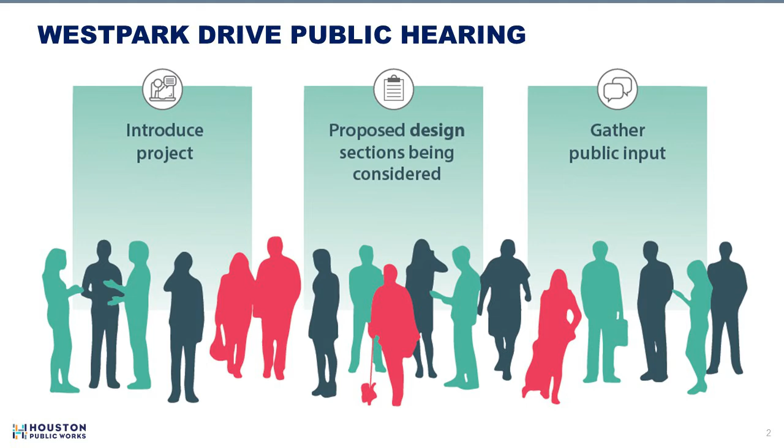In this presentation, I will describe the proposed project, provide an overview of the environmental studies that have been performed, explain the next steps in the project development process, and outline the methods for submitting comments.

The City of Houston encourages you to provide comments after this presentation and during the comment period, which extends 15 days after the day this presentation is posted online. Comments must be received via phone, email, or mailed and postmarked by Thursday, April 8th to be included in the virtual public hearing summary report.

You could submit comments in the following ways: via phone number 832-395-2090 and press 1, via email to buildforward@houstontx.gov, via the Westpark project page at www.publicworks.houstontx.gov/node/394, and via mail to Attention Westpark Drive, City of Houston, P.O. Box 1592, Houston, Texas 77251.

For general questions, please call the City of Houston phone number at 832-395-2090 and leave a message. You may email the City at any time in the development process at buildforward@houstontx.gov to ask questions about the project.

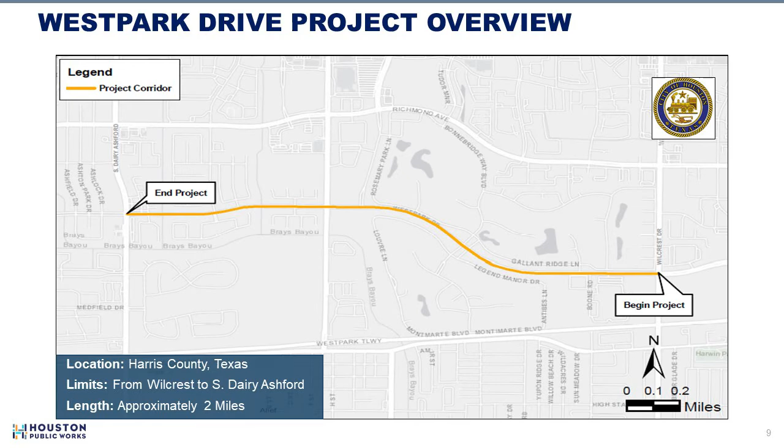The project area extends from Wilcrest Drive to South Dairy Ashford Road, west for approximately 2.13 miles on a portion of Westpark Drive located in Harris County, Texas. The existing right-of-way is 100 feet, and the proposed improvements would be within the existing right-of-way. No residential or commercial displacements are anticipated.

Westpark Drive begins as a 4-lane roadway from Wilcrest Drive, running west, just past the detention pond near Royal Oaks Country Club. It then becomes a 2-lane roadway to just west of Royal Oak Bridge. The project area then turns into a 4-lane section until just east of Fern Drive and back into a 2-lane roadway just east of Oxford Oak Street. Finally, Westpark Drive becomes 4 lanes to South Dairy Ashford Road, where the project ends.

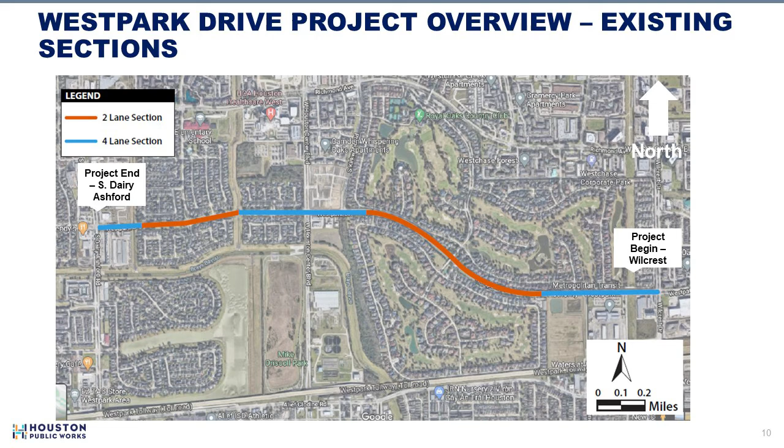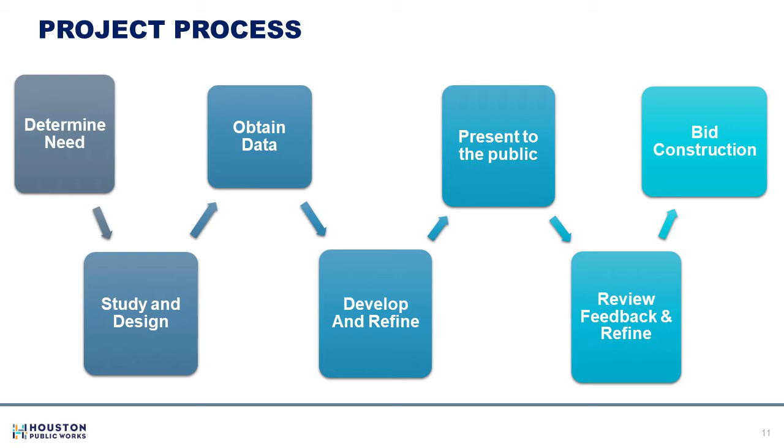Currently, Westpark Drive project area extends from South Dairy Ashford to Wilcrest Drive. The average right-of-way within the project area is 100 feet. Westpark Drive is currently a 4-lane road from Wilcrest Road to just west of the detention pond near Metro Center on Westpark Drive. There are left turning lanes and dividing medians throughout until Westpark becomes a 2-lane roadway with no dividing medians. This part of the road narrows to 2 lanes until just east of South Kirkwood Road.

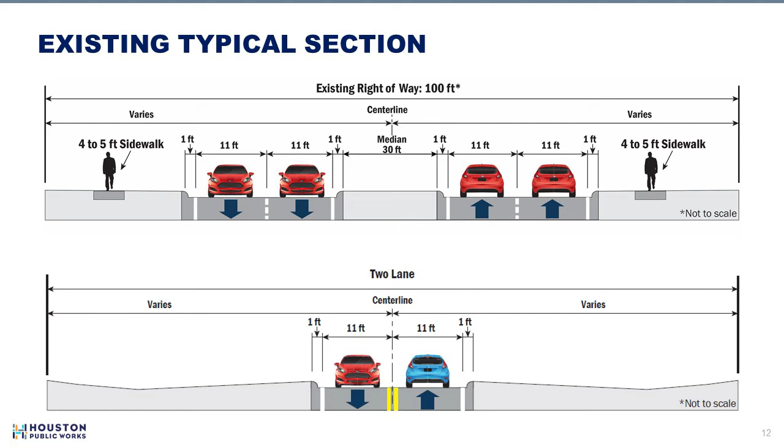At this point, Westpark Drive widens again to 4 lanes with divided medians and left turning lanes until just east of Fern Drive, where it narrows again to 2 lanes. Finally, the roadway widens to 4 lanes with divided medians and left-turning lanes, with the project area ending at South Dairy Ashford Road.

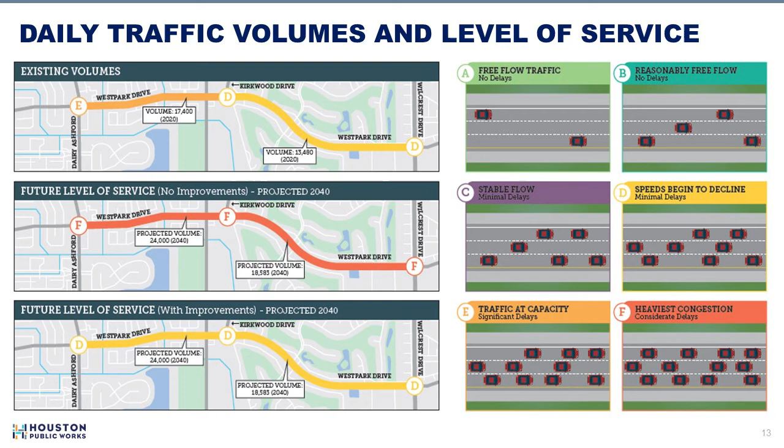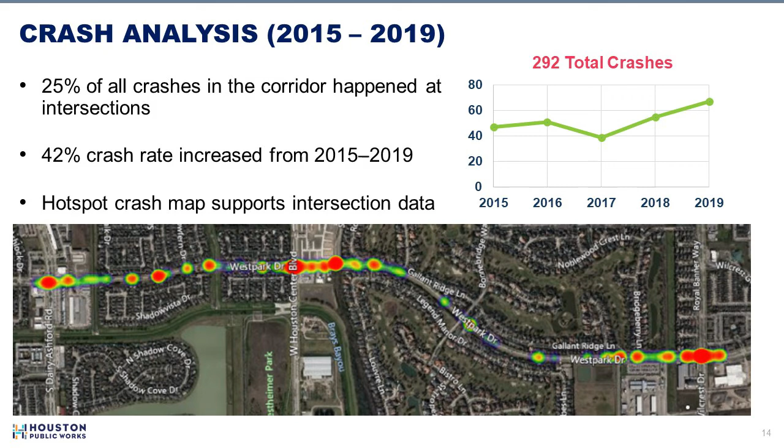The original Westpark Drive project was planned as a 4-lane boulevard, though there are currently 2-lane sections throughout the approximately 2-mile stretch of road. There are portions of the eastbound side of Westpark Drive which are missing in certain 2-lane sections. For example, the segment between West Houston Center Boulevard and Wilcrest Road exists as a 4-lane boulevard, with the exception of the eastbound lanes between Kirkwood and east side of Royal Oaks subdivision.

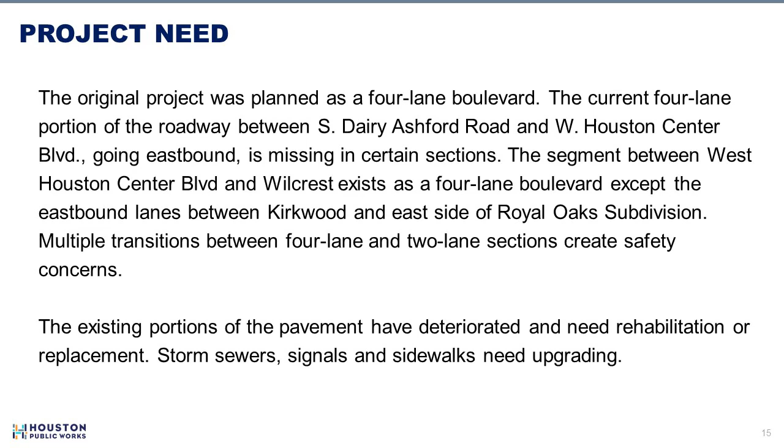Also, multiple transitions between 4-lane and 2-lane sections create safety concerns. The existing portions of the pavement have deteriorated and need rehabilitation or replacement. Storm sewers, as well as signals and sidewalks, need upgrading to meet current City of Houston standards.

The project purpose is to improve safety and mobility, complete missing portions of the boulevard, upgrade traffic signals at intersections to current City of Houston standards, improve pedestrian access and meet ADA requirements, improve drainage and reduce street flooding, improve underground utilities as necessary, add bike lanes and shared use paths to extend the system from existing on-street lanes along Westpark Drive and along Wilcrest to the future hike and bike trail, and consolidate medians to manage access.

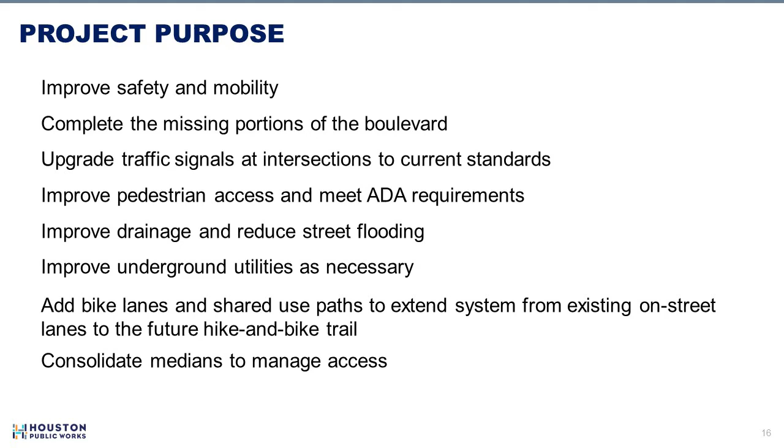The City of Houston has designed 4 proposed typical sections for current stretches of this project. In all 4 designs, the improvements include 4 travel lanes, 2 in each direction, raised medians with trees, along with different configurations of bicycle and pedestrian accommodations. The 4 sections are discussed in more detail in the following slides.

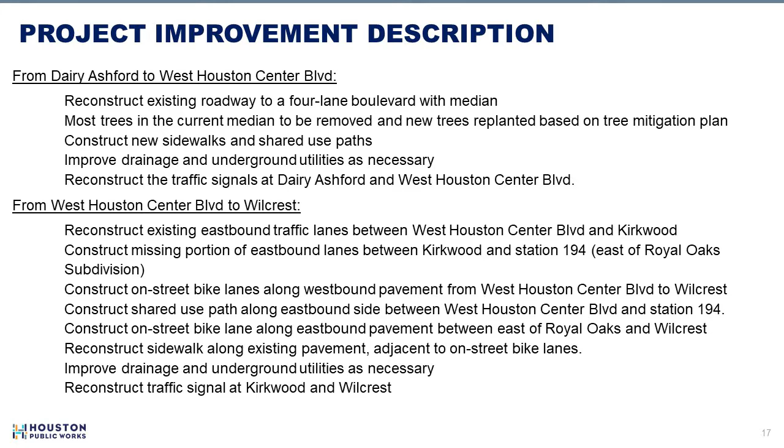The first section of roadway design, beginning at Wilcrest Drive to just east of Royal Oaks Country Club, includes 20-foot wide medians, but differs from the proposed Section 2. In this section, the 4 11-foot wide lanes exist on mostly existing pavement, but would be extended with 2 5-foot wide sidewalks and 2 5-foot wide bike lanes on proposed and existing pavement in each direction.

The proposed Section 2 extends from east of Royal Oaks Country Club to West Houston Center Boulevard and includes 2 11-foot wide travel lanes in each direction with 2 20-foot medians. This section would also include 1 dedicated 10-foot wide shared use path going eastbound and a dedicated 5-foot wide sidewalk with a 5-foot wide bike lane going westbound.

The proposed Section 3 on Westpark Drive from West Houston Center Boulevard to east of Shadowfern Drive would also have 4 11-foot wide lanes, 2 in each direction. However, this section would have 18-foot wide raised medians and 2 dedicated 10-foot wide shared use paths for bicyclists and pedestrians on either side.

For the proposed Section 4, from east of Shadowfern Drive to South Dairy Ashford Road, there would be 4 11-foot wide travel lanes, 2 in each direction, running east and westbound, as well as 26-foot wide raised medians. Pedestrian upgrades to this section include 2 dedicated 6-foot wide proposed sidewalks on either side of Westpark Drive.

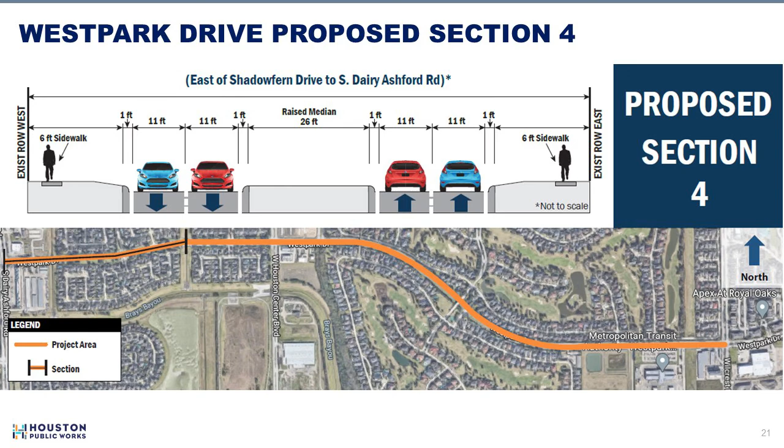Though no additional signals would be built, existing signals located at the intersections of South Dairy Ashford, West Houston Center, Kirkwood, and Wilcrest would be replaced to meet the current City of Houston utility and safety standards, including safety upgrades for bicycles and pedestrians.

Here is a screenshot of the legend for the project layout that you can find on the website. These legends are included on each page of the layouts, so you can reference it as you review them. The screenshot on the right shows the colors that will fill the proposed design. These colors identify the limits and major aspects of the project.

Let's walk through them. The yellow color identifies the proposed pavement on Westpark Drive. The existing right-of-way line is orange. The red line marks the end of the proposed intersections and additions to the roadway. The green line shows the proposed sidewalk, and the pink line outlines the roadway itself. Lastly, the black line with smaller black lines mark the updates to the roadway and shows additional lanes.

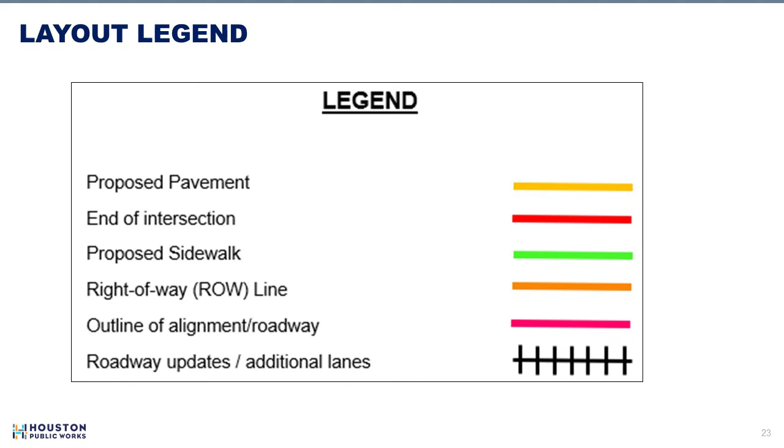The engineering team has developed project layouts to design proposed improvements that meet the project needs, while minimizing the additional right-of-way needed and displacements and impacts to private property. We are showing a high-level overview of layouts and have included a large PDF on the project website. You can see the link at the bottom right of the slide that will take you to the maps on the City of Houston project website.

The engineering team has broken the project layout into 2 pages to show you more detail about the roadway design sections. If you would like to take a closer look at the designs for a specific area of the project, you can download the project layout by clicking on the link on the presentation PDF, then clicking on the project layout link and zoom in on your locations of interest.

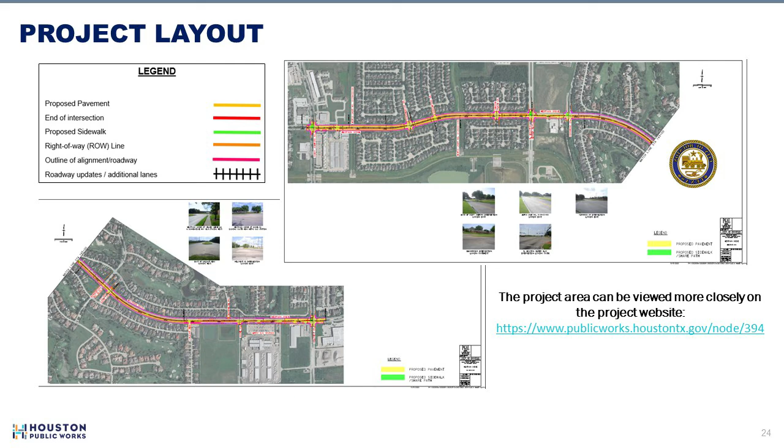The City of Houston considered several factors when developing the designs and upgrades to provide equitable access for all Westpark Drive users, including bicyclists and pedestrians. These considerations include bike lanes, sidewalks, and shared use paths.

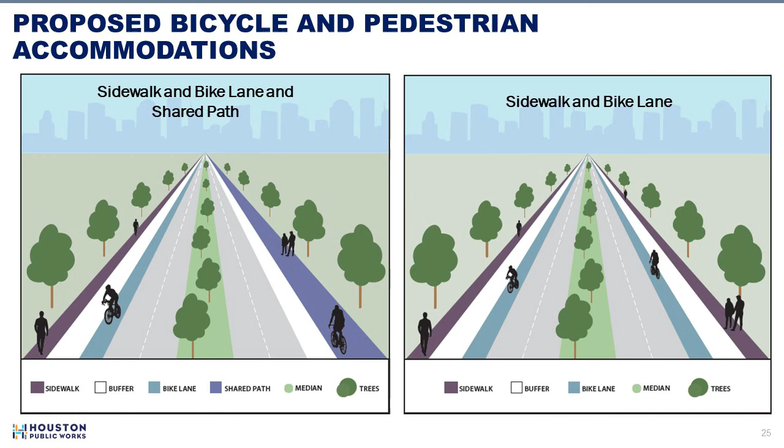Shared use paths and bike lanes are proposed running west and eastbound along the roadway. 5-foot sidewalks are also proposed with a 3-foot buffer, shown in white, between the sidewalk and the bike lanes. There are also 5-foot buffers between the shared use paths and the road. The two graphics here show a representation of sidewalks, bike lanes, and shared paths, which are all proposed bike and pedestrian accommodations varying throughout the approximate 2-mile roadway.

Funding of the Westpark Drive project breaks down into federal, local, City of Houston, and state, TxDOT. The total design fee is approximately $2.1 million and fully funded by the city. Federal funding participation is approximately $9.7 million. The total construction cost is approximately $15.4 million. The City of Houston provides the design and construction, while TxDOT provides oversight and review due to federal funding.

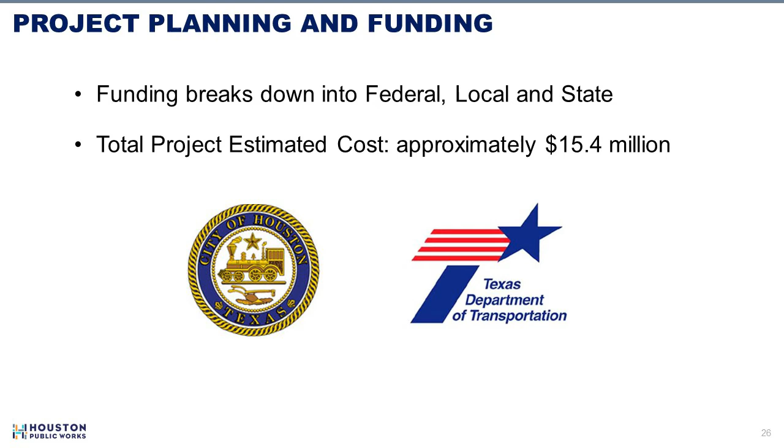I will now discuss the environmental studies completed for this proposed project. The project team identified and evaluated potential environmental impacts that could occur as a result of constructing the proposed improvements. Technical reports for each of these studies are available online on the project webpage for public review.

As part of the project's NEPA compliance, the City of Houston considered biological resources, community impacts, water resources, hazardous materials, archaeological and historical resources, and park and recreational areas. The project was designed to avoid or minimize impacts to the greatest amount practicable. Overall, impacts to the environmental resources as a result of the proposed Westpark Drive improvements would be minimal.

First, I will discuss the biological resources study. Most of the project area consists of urban streets and neighborhoods. The project area does not contain suitable habitat and is not within range of any listed threatened or endangered species. The project area is also not within range of any species of greatest conservation need.

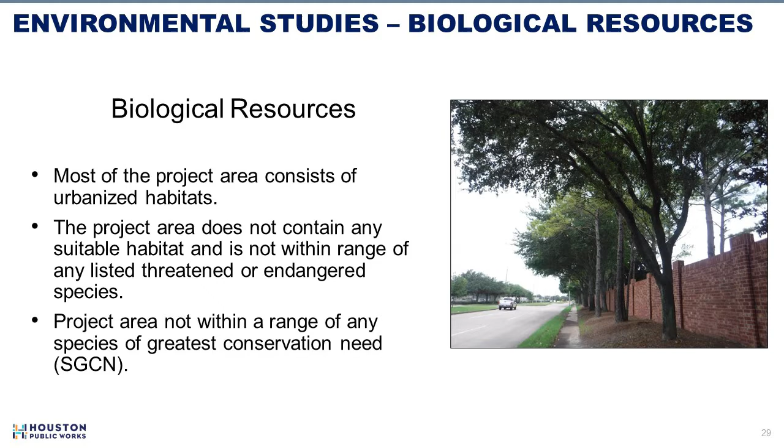Next, I will discuss community impacts. Minor access changes would result from median opening consolidations. No displacements are anticipated as a result of the proposed project. Limited English proficiency populations were identified within the project area. These persons were provided, and will continue to be provided, the opportunity for meaningful involvement in the NEPA process for the proposed project.

Design elements for the proposed improvements include improved drainage, as well as increased amenities for bicycle and pedestrian traffic. Increased safety and mobility is expected with a new proposed bike lane, which would integrate into the existing bike path network. Continuous sidewalks are also proposed while improving mobility within the project area.

No displacements and no adverse community impacts are anticipated with the proposed project. Overall, the proposed design features would enhance mobility and access and would reduce congestion and improve safety for both minority and non-minority census geographies.

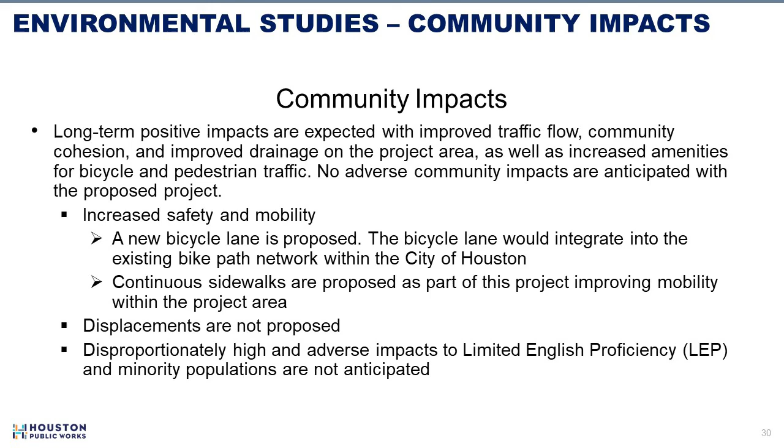In addition to community impacts, access changes provide significant impact to the project area. The first access change is the closure of the existing median opening east of Dairy Ashford. This access change impacts two driveways at this location.

The second access change is at the Shadowfern intersection of Westpark Drive. Access to this intersection allows left turning access to the side street but no access out, turning left out of the side street.

The most significant access change is the closure of the median opening on Westpark between West Houston Center Boulevard and Kirkwood Road. This closure impacts the left turn access to the gas station from westbound traffic. This location was decided on due to safety concerns and the need for access from the westbound left turn lane, which has a high volume of turning vehicles.

The last access change is the median opening providing access to the Cube Storage Building west of Wilcrest. Left turns out of this storage facility are not ideal.

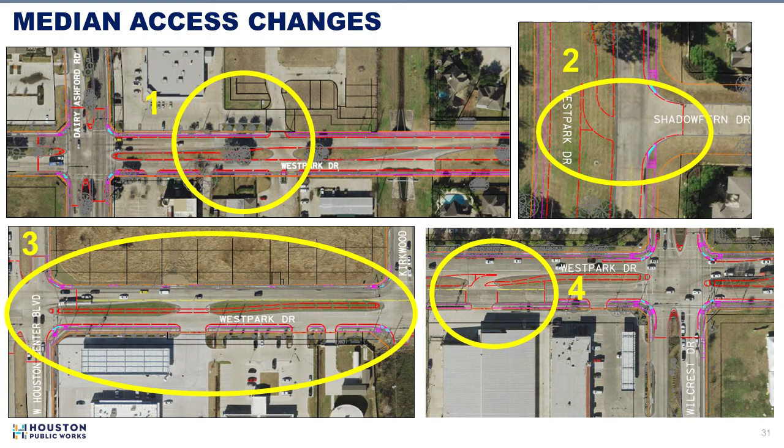Another environmental resource studied was waterways. The Westpark Drive project area crosses two man-made drainage canals between South Dairy Ashford and West Houston Center Boulevard, and each of these canals connects with Brays Bayou. Approximately 72% of the project area is located within the 100-year floodplain, and 28% is within the 500-year floodplain.

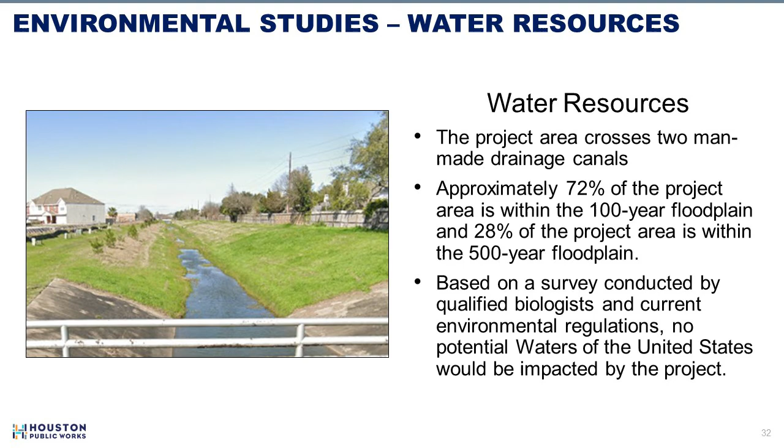Based on a survey conducted by qualified biologists and current environmental regulations, no potential waters of the United States would be impacted by this project.

No unresolved hazardous material concerns were identified, and no potential concerns were found during the hazardous material initial site assessment process which would impact the project area. No hazardous materials action is required for the project area.

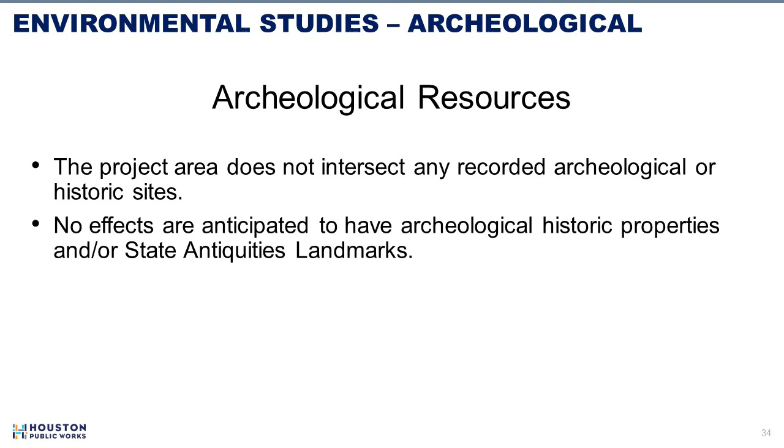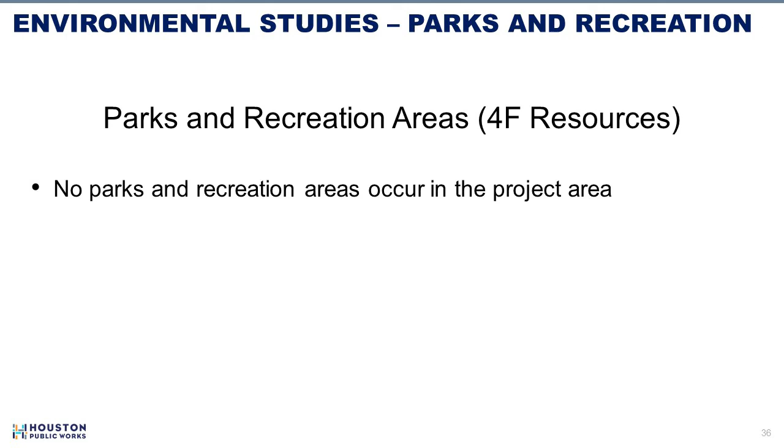Next, we have archaeological resources. The Westpark Drive project area does not intersect with any recorded archaeological or historic sites. No effects are anticipated to archaeological historic properties and/or state antiquities landmarks. Regarding non-archaeological historic properties, no historic properties are anticipated to be impacted by the proposed project. No parks or recreation area impacts occur in the project area.

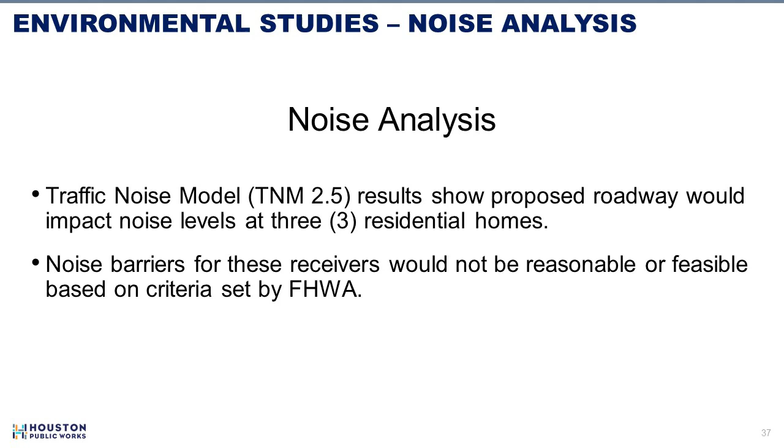Noise impacts were forecasted using the Federal Highway Administration's Traffic Noise Model 2.5 to estimate future noise levels at residences and other sensitive receivers near the proposed Westpark Drive. Most of the residential homes on Westpark Drive have existing 7-foot barriers. Noise walls up to 20 feet in height placed along the right-of-way would not be reasonable or feasible based on criteria set by FHWA.

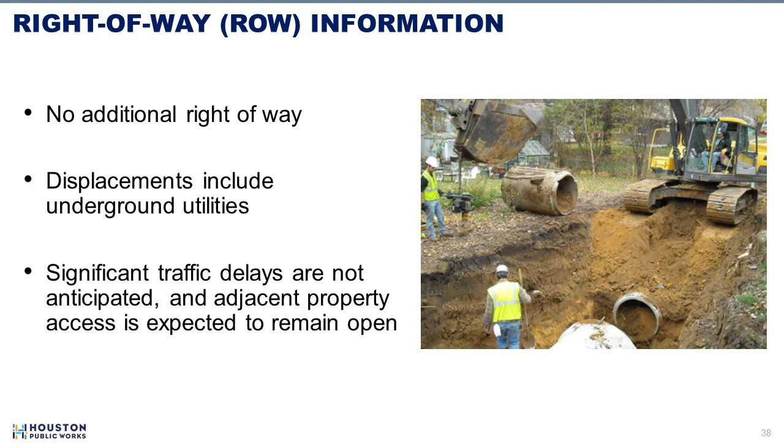Therefore, a noise wall is not proposed for these locations. The proposed project would take place within the existing right-of-way. This project would not displace any above-ground structures, but would include the displacement and relocation of underground utilities. Significant delays in traffic due to construction would not be anticipated, and access to adjacent properties would be expected to remain open throughout the construction process.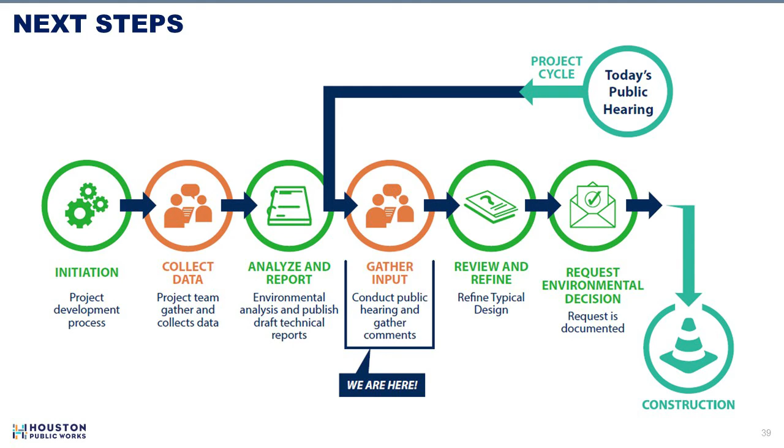The next steps include refining the design and requesting the environmental decision. Provided the environmental documents and process are approved, the project would then move into detailed design and finally construction. As stated earlier, construction is scheduled to begin in mid-2021. The project team anticipates that construction would take approximately 2 years.

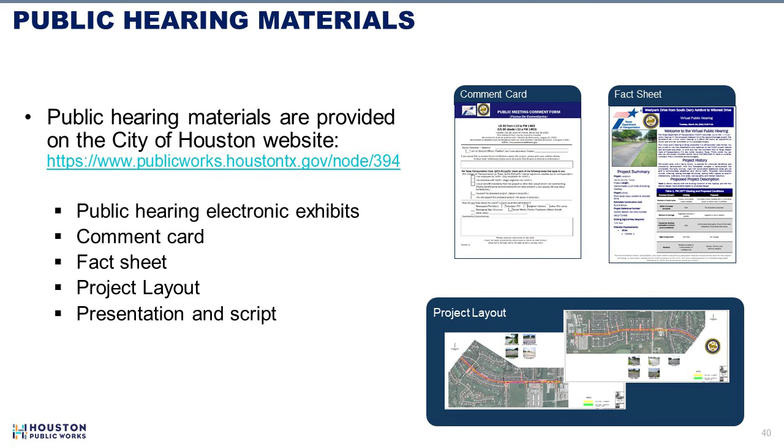The City of Houston project website shown here contains all materials presented in this virtual public hearing, including this presentation in both English and Spanish. These materials include exhibit boards, a comment card, a project fact sheet, project layouts for the proposed improvements, presentation and script, and the environmental technical reports. The project layouts provide a more in-depth look at details such as intersection improvements, sidewalks, shared use paths, and the existing right-of-way.

This concludes the project information presentation for the Westpark Drive Paving and Drainage Project. The next few slides describe the ways you can comment on the proposed project and contact information for general project questions.

The City of Houston encourages you to provide comments. Comments must be received via phone, email, or mailed and postmarked by Thursday, April 8th to be included in the virtual public hearing summary report. You can submit comments in the following ways: via phone number 832-395-2090 and press 1, via email to buildforward@houstontx.gov, via the Westpark project page at www.publicworks.houstontx.gov/node/394, and via mail to Attention Westpark Drive, City of Houston, P.O. Box 1562, Houston, Texas 77251.

Members of the public who wish to participate may call the City of Houston at 832-395-2090 and press 1 to verbally provide testimony. All comments must be received on or before 11:59 p.m. on Thursday, April 8th. Responses to written comments received and public testimony provided will be available online at www.publicworks.houstontx.gov/node/394 when completed.